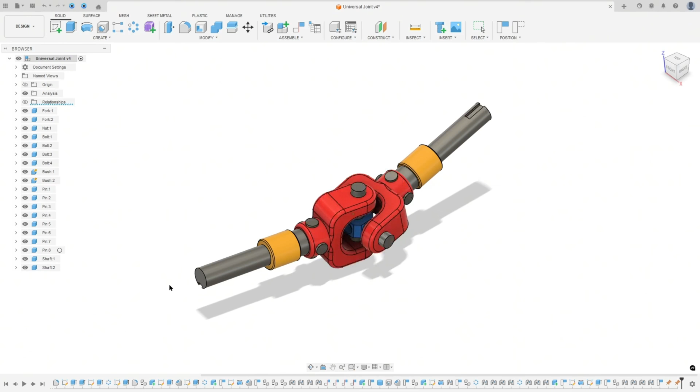Let's make one more tutorial in Autodesk Fusion. In this video, you'll learn how to design a universal joint. So open Fusion and let's go.

The first step to create the universal joint is to make part 1, the fork. Here will be the midpoint. The first thing we'll make is a construction line with 56 millimeters, and we'll make this sketch. The fillet we'll make later. This line has 15 millimeters, this line 19 millimeters. The distance between this line and this one is 42 millimeters.

So open Fusion and go to Assemble, select new component. The name here will be fork, and press OK. Go to create a sketch, select the front plane, select line, a construction line.

Click here in the midpoint, make a construction line with 56 millimeters of length. Select the line again, but remove the construction line type. Make this sketch.

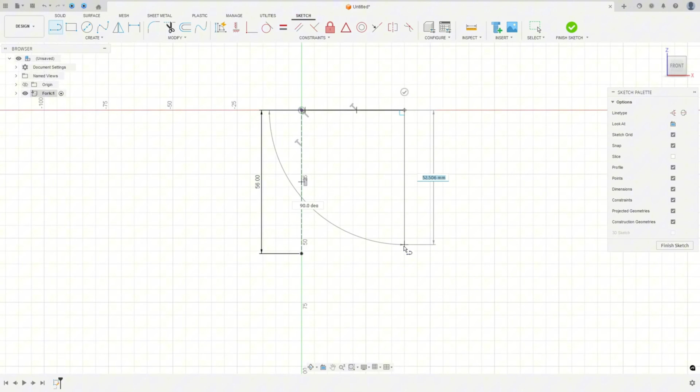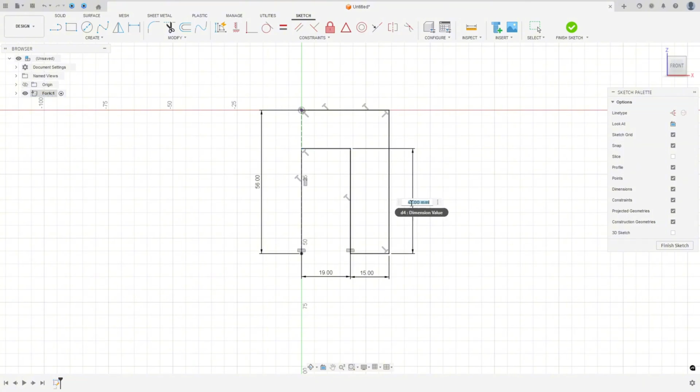Go to constraint, select horizontal vertical, select this point and this point here. Go to sketch dimension, the distance here 15 millimeters, the distance here 19 millimeters, and the distance between these two lines is 42 millimeters. We made this.

Now go to mirror, the object, select this line. I made 2 lines here, sorry. Select this line here, and for the mirror line, select this construction line and press OK.

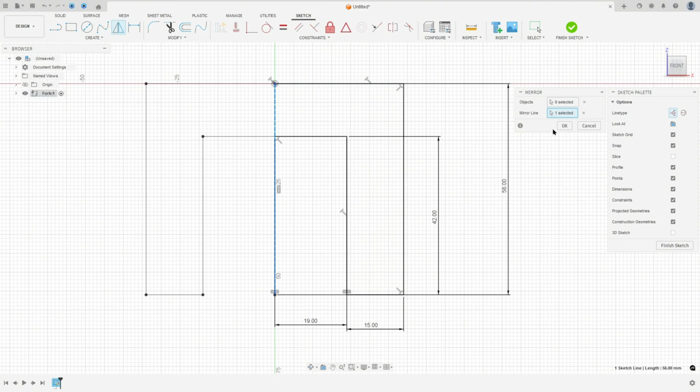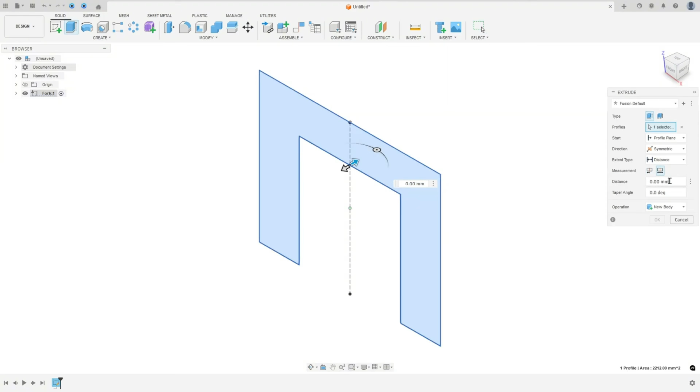Finish the sketch. We need to extrude this. The distance between these 2 points will be 34 millimeters. So go to extrude, select this profile, the direction symmetric, measurement whole length, the distance 34 millimeters. Operation new body, press OK. We made this.

Now we'll make this fillet here. This fillet has 17 millimeters. To make this, we use the full round fillet. So go to fillet, the fillet type, select full round fillet. Select this face, add selection set, select this face and press OK. We made this.

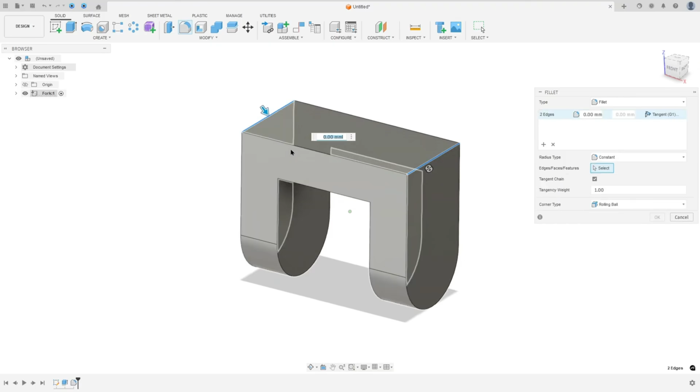Now we'll make this fillet with 15 millimeters and this one. So go to fillet again, the type, select the fillet, select this edge, this one, this edge and this one, 15 millimeters of radius and press OK. We made this.

Now we'll make this cylinder here. We have a circle with 34 millimeters of diameter and a hole here with 19 millimeters of diameter, and we need to extrude the cylinder 20 millimeters.

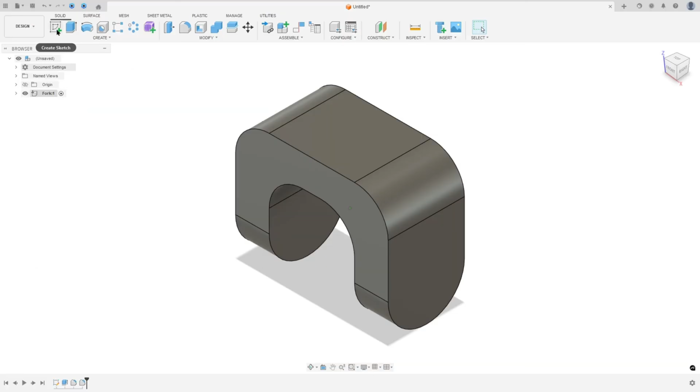So go to create a sketch, select this face, select the circle, make a circle here with 34 millimeters, and make another circle here with 19 millimeters of diameter. Finish the sketch, go to extrude. Extrude this 20 millimeters, operation join and press OK.

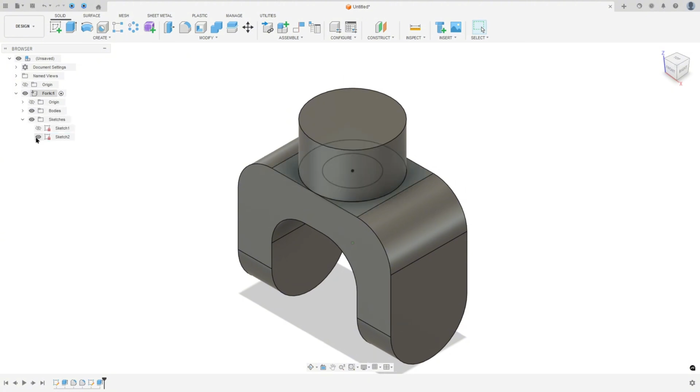Show sketch 2 again and go to extrude, select the circle with 19 millimeters of diameter. The direction symmetric, the extent type select all, operation cut and press OK. Hide sketch 2. We made this.

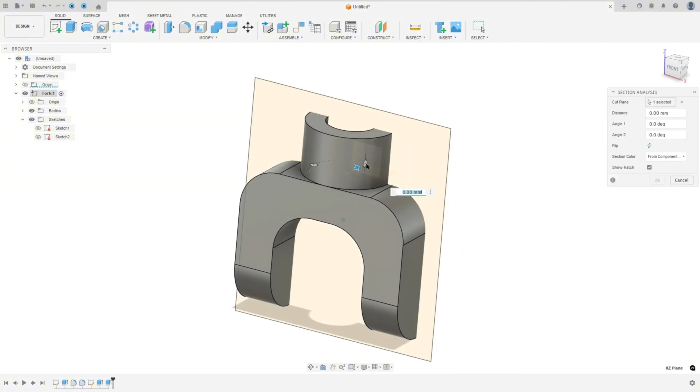Let me show for you. We made this, okay.

Now we'll make this hole here. This hole has 6 millimeters of diameter, and the distance between the center of this hole and this face here is 10 millimeters.

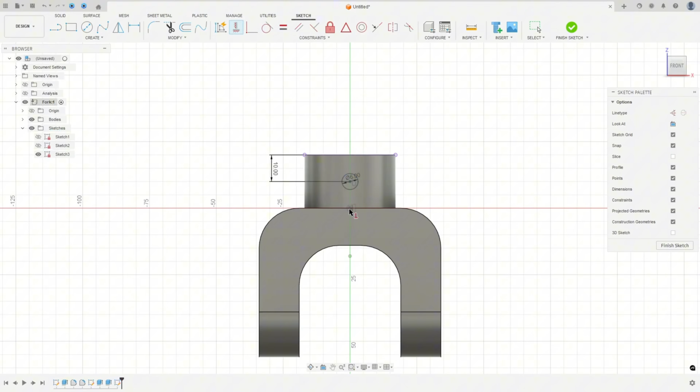So go to create a sketch, select the front plane, select a circle, make a circle with 6 millimeters of diameter. Go to sketch dimension, the distance here 10 millimeters, and go to constraint, horizontal, vertical, select this point and the midpoint. We made this, finish the sketch, and go to extrude.

The extrusion here, select all, operation cut, and press OK. We made this cut here.

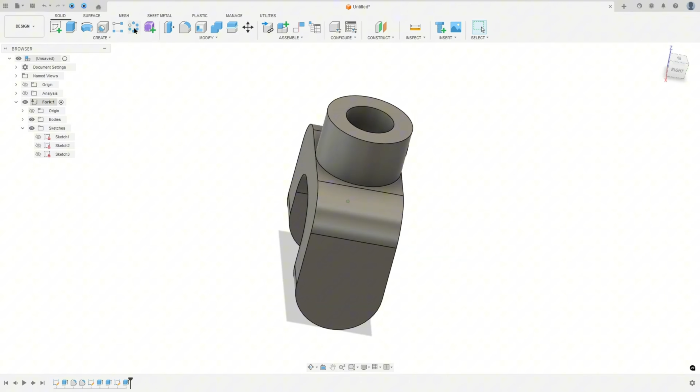Now go to create and select circular pattern. The object type, select features. The object, select this cut. And the axis, select this circle here. The quantity here is 4. Press OK. We made this.

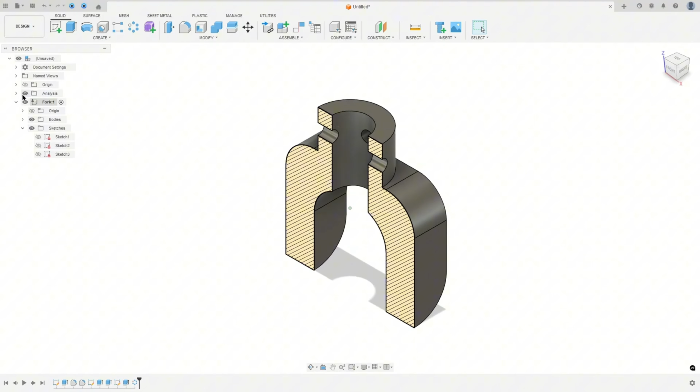Now we'll make this cut here. This cut has 12 millimeters of diameter, and the distance between the center of the circle and this edge here is 16.5. So it is not concentric with this arc, okay?

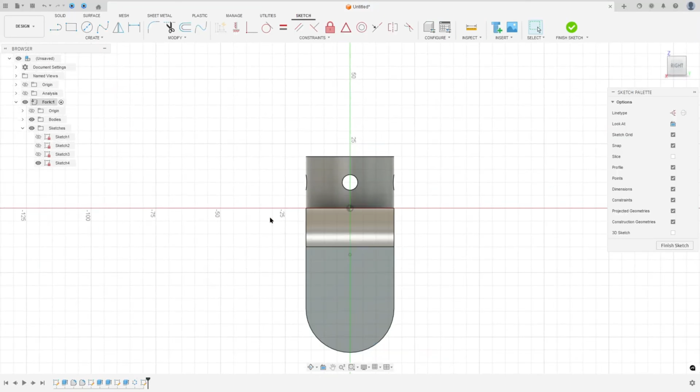So go to create a sketch and select this face here. Select the circle, make a circle here with 12 millimeters of diameter, and go to sketch dimension, click with the right button and select pick circle arc tangent. Select this arc here and this circle. The distance here 16.5. Go to constraint, select horizontal, vertical, select the circle and the midpoint here.

Finish the sketch, go to extrude, select this profile. The direction one side, the extent select all, flip the direction, operation cut, and press OK. We made this.

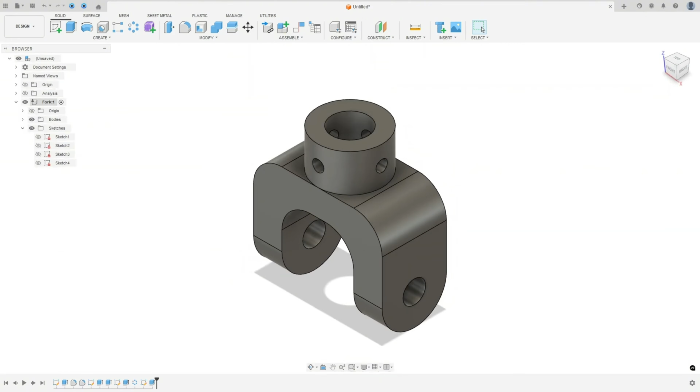Now we need to make a fillet here in this body. The fillet has 3 millimeters of radius. So let's create this. Go to Modify and select the Fillet.

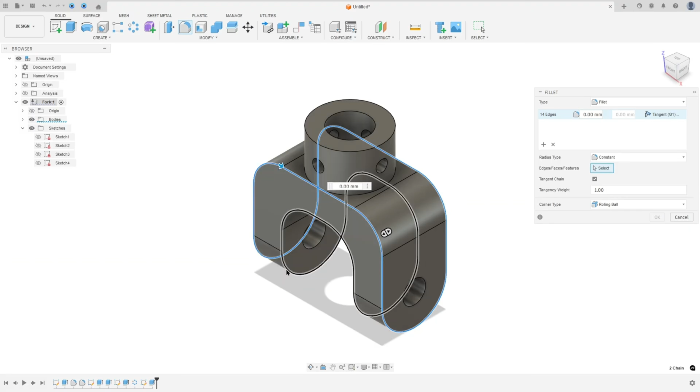Select this edge here, this edge, and select this edge here. The fillet here is 3 millimeters. Add selection set and select this edge here, 3 millimeters, and press OK.

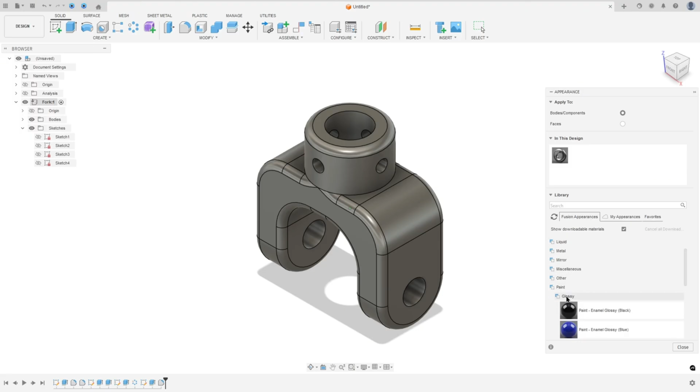We made this. Now I will add some color here. Press letter A in the keyboard. I will paint this. Select the painting, glossy. It will be red. Press OK. We made this.

Now save this file. Universal joint.

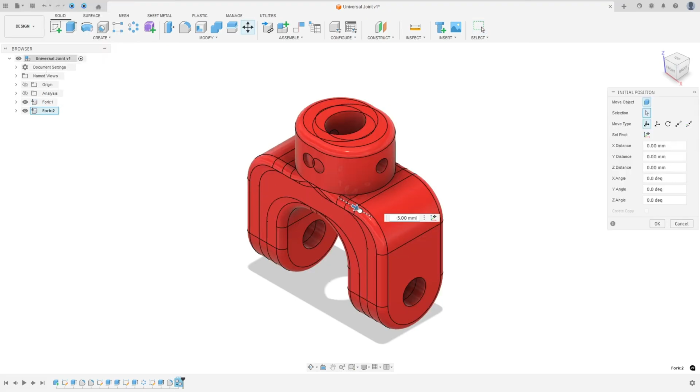And here activate this universal joint. And here click with the right button, copy and paste. Move this a little bit and press OK.

Now we'll make the part number 2, the nut. So the first thing that we'll make, we'll select the top plane and make a square, 25.4 millimeters on both sides. And we have a circle here with 12 millimeters of diameter. And we need to extrude this 15 millimeters.

So let's create this. Hide the fork 1 and 2 and go to Assembly, select New Component. The name here will be nut. Press OK. Go to create a sketch and select the top plane and select the 2-point rectangle, center rectangle, click here in the midpoint.

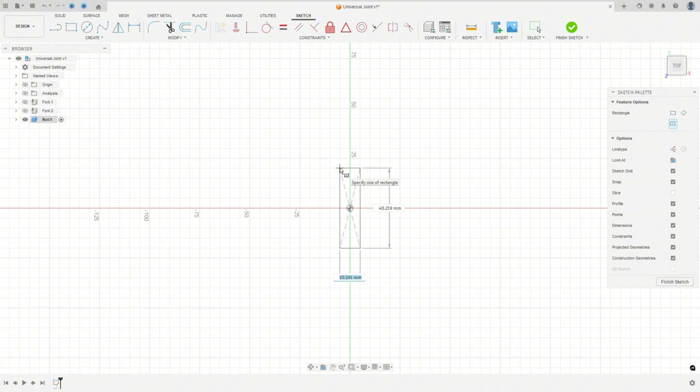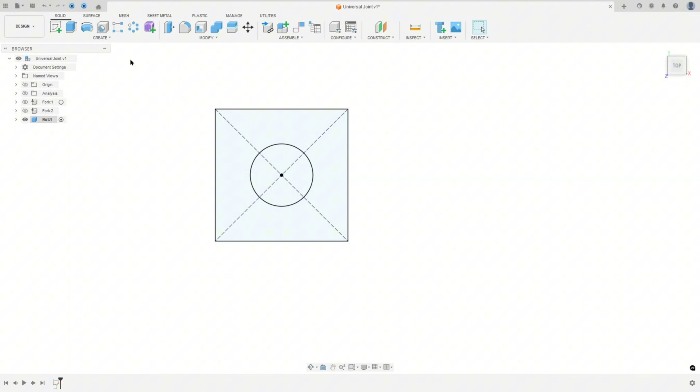25.4 by 25.4, press OK. And select the circle. Make a circle here in the midpoint with 12 millimeters of diameter and press OK. Finish the sketch, go to Extrude, select this profile, extrude this, the direction symmetric, measurement whole length, and the distance 15 millimeters. Operation new body, press OK.

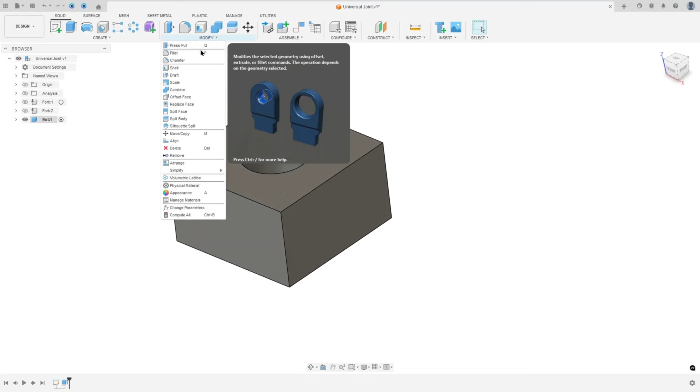We made this. Now let's make the chamfer here. The chamfer is 5 by 5 millimeters. So go to Modify, select the Chamfer, select this edge, this edge, this edge, and this one. The distance here is 5 millimeters. And press OK.

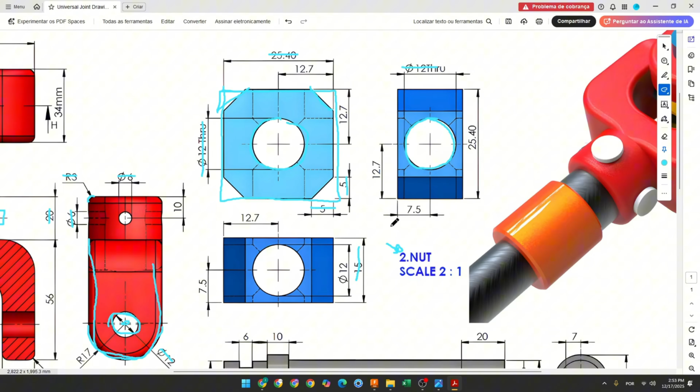Now we'll make the cut in the other side. The cut has 12 millimeters of diameter. So let's create this.

So go to create a sketch and select this face, or select this plane, select the circle, make a circle here with 12 millimeters. Finish the sketch, make sure that the circle is in the center of the plane, and go to Extrude, Direction symmetric, Measurement whole length, and the extent type select all, and press OK.

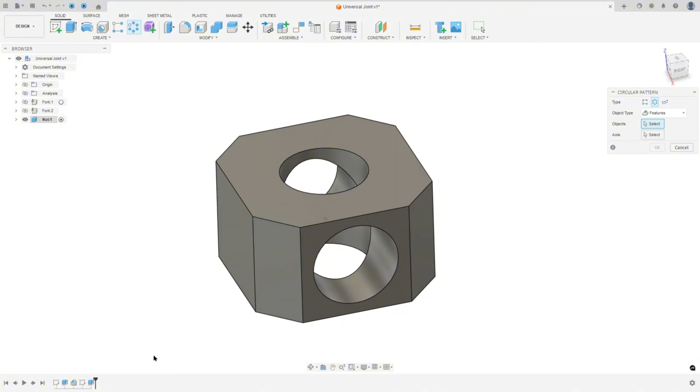We made this. Now go to Circular Pattern, the object type select features, the object select this cut, the axis select this circle, the quantity here is 2, distribution here partial, 90 degrees, and press OK. We made this.

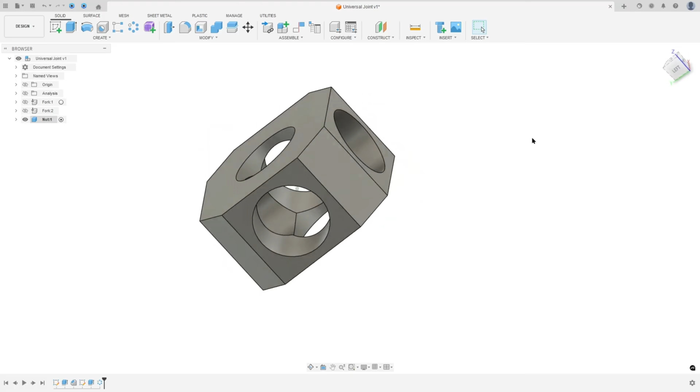Now I will add some color here, press letter A in the keyboard, it will be blue. Okay, we made this.

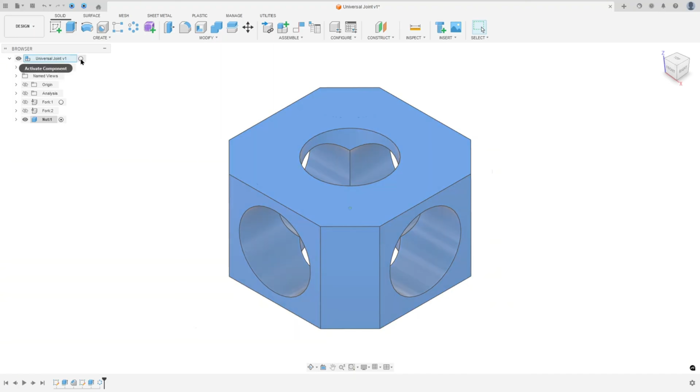Now activate the universal joint. Let's see the other components here. Let me move this component a little bit and save the file.

And now we will create the component 3, the bolt. And here, to create this, we'll select the front plane and make this construction line. And make this sketch here. The distance between these two lines here, 33 millimeters.

The distance here, 7 millimeters. And the distance here will be 6 millimeters. And the distance here will be 7 millimeters. Okay?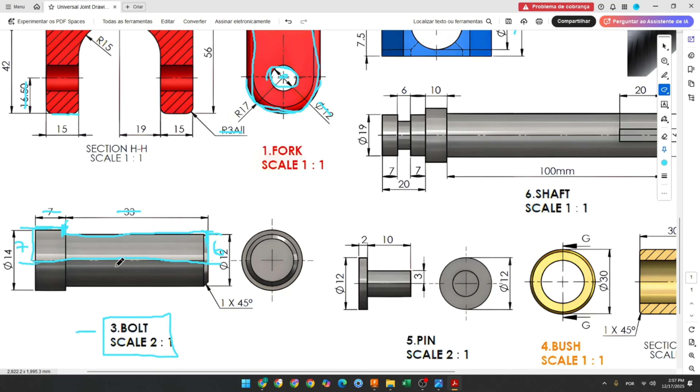So hide the fork 1, 2, and 3. And go to Assembly, select a new component. The name here will be bolt. And press OK.

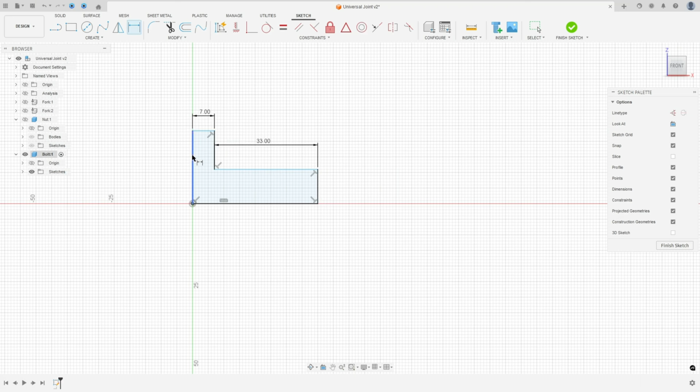And go to create a sketch and select the front plane. Select a line. Make this sketch here. Go to sketch dimension. The distance here 33 millimeters. The distance here 7 millimeters. This line here has 7 millimeters and this line here has 6 millimeters.

And go to finish the sketch and go to Revolve. The axis, select this line here. Operation new body, press OK.

Now we need to create a chamfer here with 1 millimeter. So go to Modify, select the Chamfer. The type equal distance, select this edge here, 1 millimeter, and press OK. We made this.

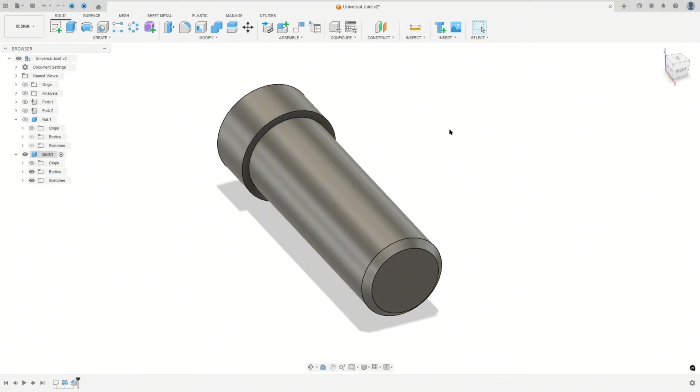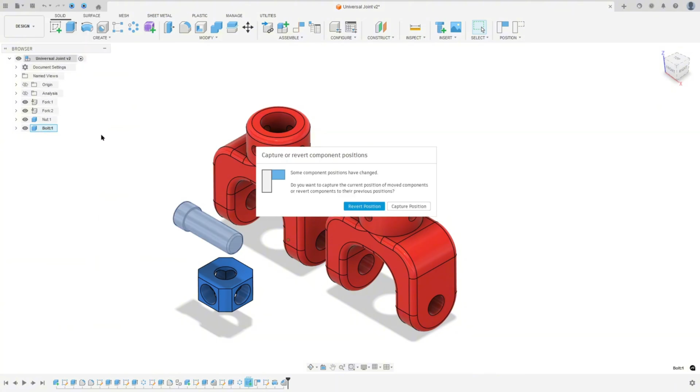Now activate the universal joint. Show the other components, I'll move this a little bit. In this exercise we will need 4 bolts, 1 and 2 on the bottom side here, and on this face we have 1 more. So click with the right button here, copy this and paste. Capture position, move this a little bit, press OK, paste again, Ctrl V, press OK, and paste 1 more, and press OK. We made this.

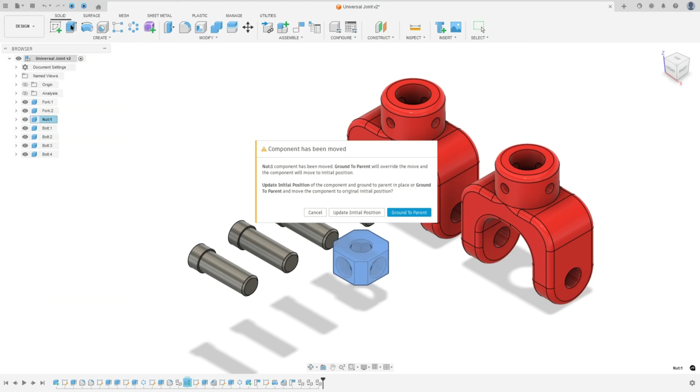Now click with the right button here in the fork and unground from parent. Make the same for fork 2, unground from parent. And in the nut, click with the right button and ground to parent. Move this a little bit.

And here, go to assembly, select joint. Select this circle and this one. Flip the direction and press OK. Make the same for the other component here, the bolt and the fork.

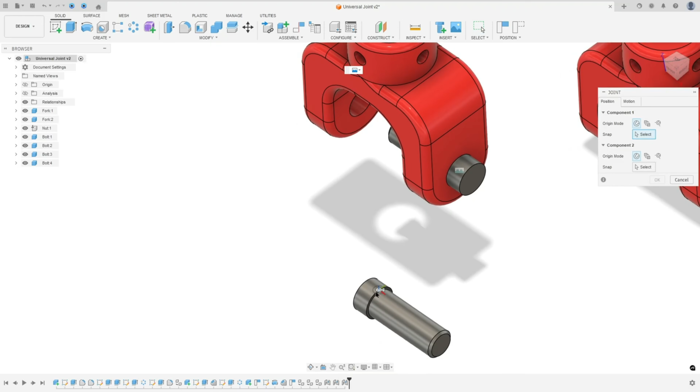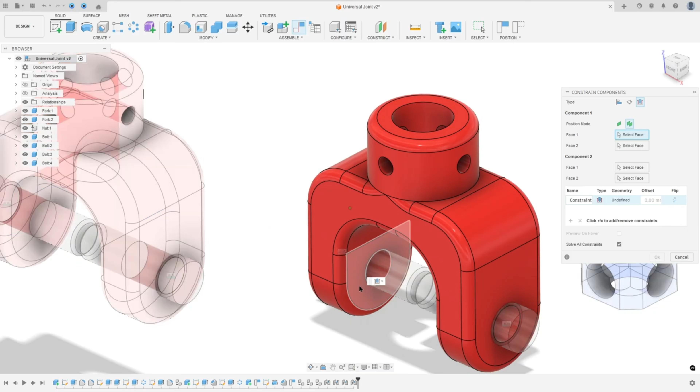We made this. Now go to assembly and select constraint components. For the type here, select center. Component 1 will be this fork, so select this face and this face here. Component 2 will be the nut, so select this face and this face. We made this, press OK.

And go to constraint again. For the type here, select align, select this surface here, and select this face here, this circle, to make this concentric, and press OK. We made this.

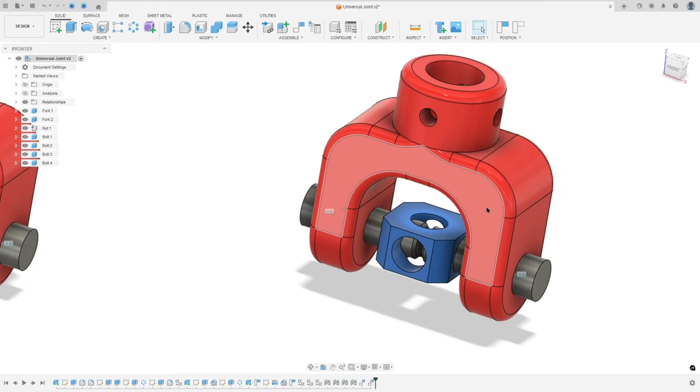Now make the same for this one. Let me rotate this a little bit. Go to constraint, and for the type here, center, select this face and this face here. And in the nut, select the top face and the bottom face. And press OK.

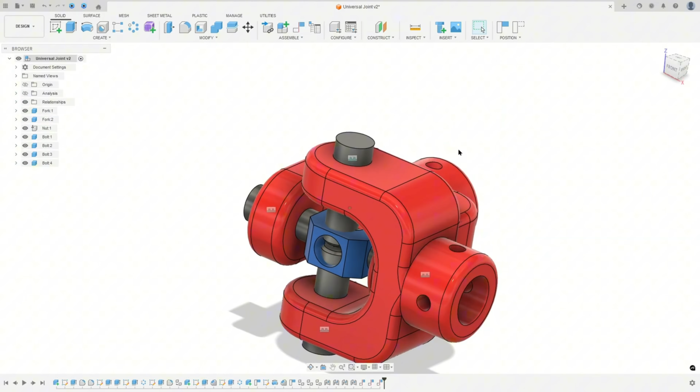And go to constraint again, select this face and this face here to make this concentric. And press OK. We made this, OK.

Now we'll make the bush, number 4. So to create this bush, we'll make a cylinder with 30 millimeters of diameter and 30 millimeters of length. And in the center we have a hole with 20 millimeters of diameter. And in the corners we have a chamfer with 1 millimeter.

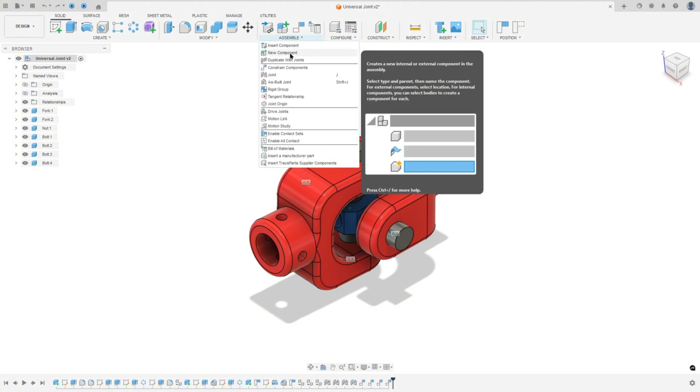So go to assembly, select new component. The name here will be bush. And press OK. Hide the other components.

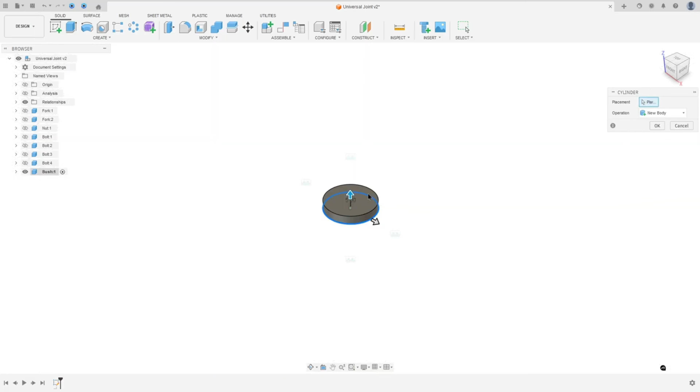And go to create and select the cylinder. Select the top plane, capture position, click here in the midpoint. The diameter here is 30 millimeters. And we need to extrude this 30 millimeters.

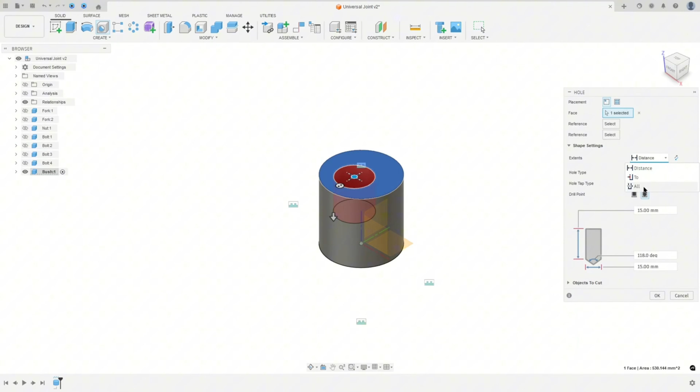And press OK. The hole here, 20 millimeters. So go to create, select the hole, select this face. For the extents, select all. Add reference, click here in this arc. And the diameter, 20 millimeters. And press OK.

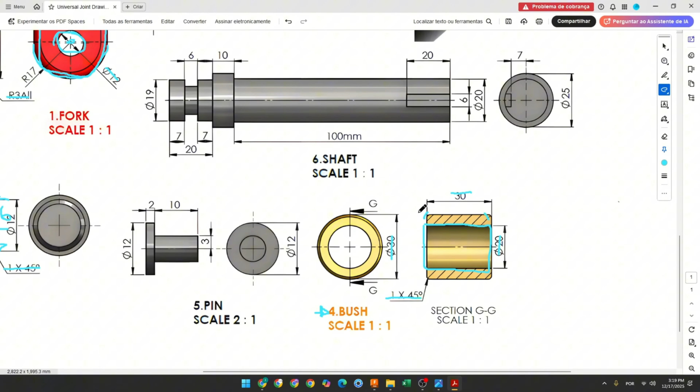We made this. Now we need to create this chamfer with 1 millimeter. So go to modify, select the chamfer, select this edge and this edge here, 1 millimeter. And press OK. Press letter A on the keyboard, I will paint this yellow.

OK, activate the universal joint and show the other components, and save this project. I will move this a little bit.

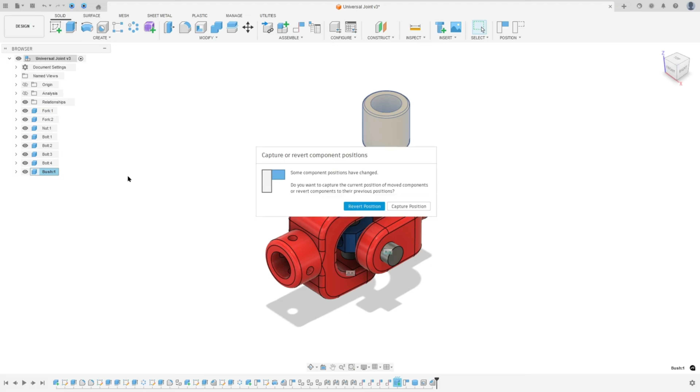Now click with the right button here and copy this and paste, Ctrl V, capture position, move this a little bit, press OK.

Now we'll make part 5, the pin. So to create this, we'll make a construction line here in the center, a line, sorry, in the center, and create this sketch here. We have the dimensions: 2 millimeters here, 10 millimeters, 3, and here is 6. And we'll use the Revolve feature to make this body.

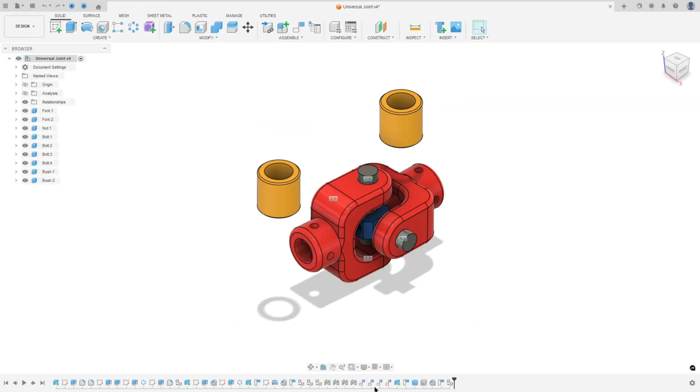So go to Assembly and select new component. The name here will be pin. Press OK. Hide the other components. And go to create a sketch. Select the front plane, select line. Make this sketch here.

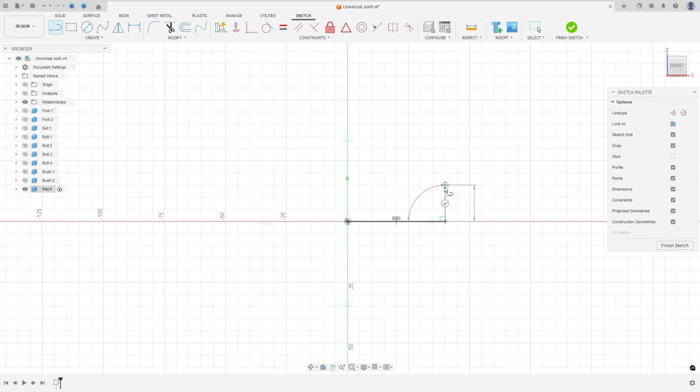Go to sketch dimension. The distance here is 2 millimeters. The distance here is 10. 3 millimeters here and 6 here.

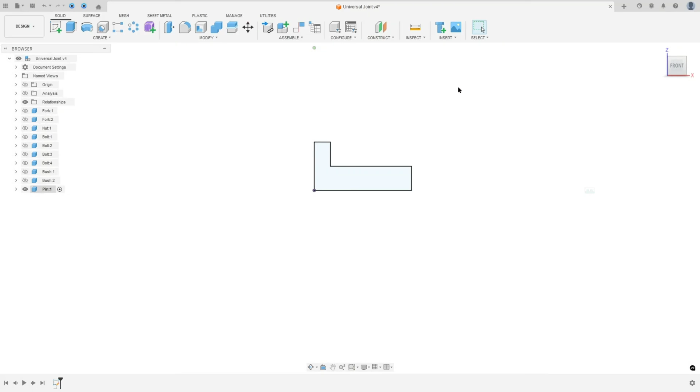And finish the sketch, go to Revolve. The axis, select this line and press OK. Show the other components, I will move this a little bit here. Show the other components. And activate the universal joint.

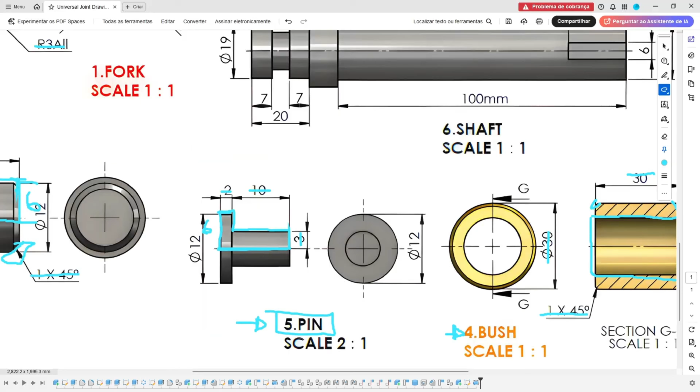Let me ground it to parent here. Okay, let me move this a little bit. And here we'll need to make 8 of this one, 4 for each side.

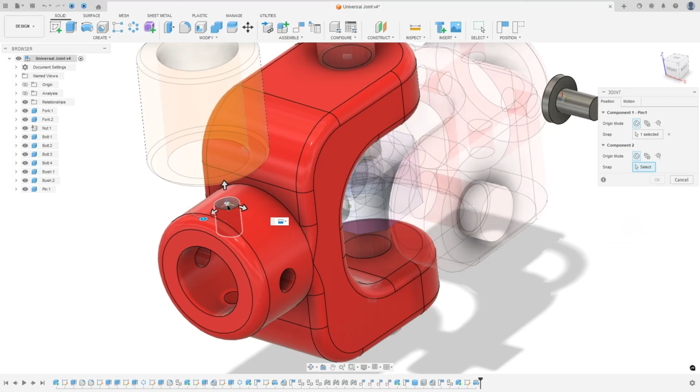So go to Assembly, select joint, and select this one, and select this face here, the center of this face. Flip the direction. Let me hide this bush here and press OK. We made this.

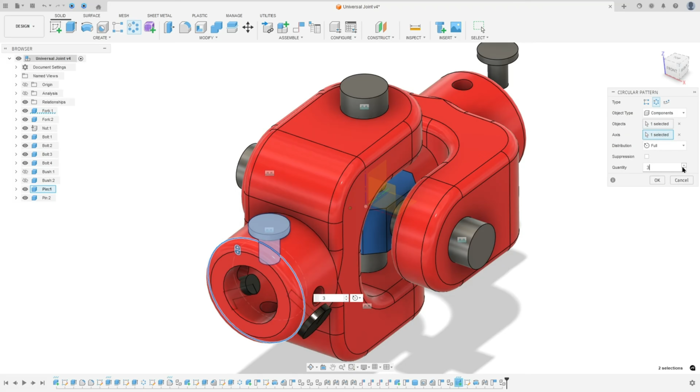We need to create 3 more on this side, but first copy this and paste, Ctrl V, move this a little bit here, press OK. And here go to circular pattern. For the component, the object type, select component. The object, select this component. The axis, select this arc here. Quantity 4, press OK.

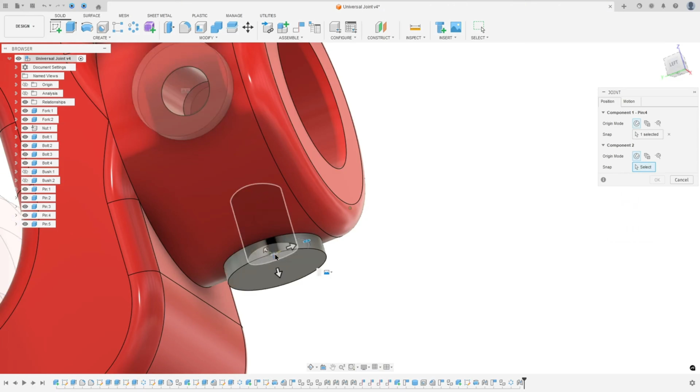We need to create a joint, so go to joint. Select this arc here and select the center of this face. Press OK. The same for this one: select this arc and the center of this face. And the same here, press joint or letter J.

Now make the same for the other side. I use the circular pattern to copy this.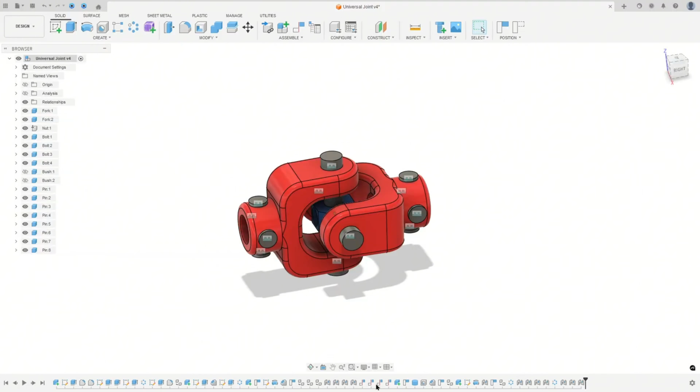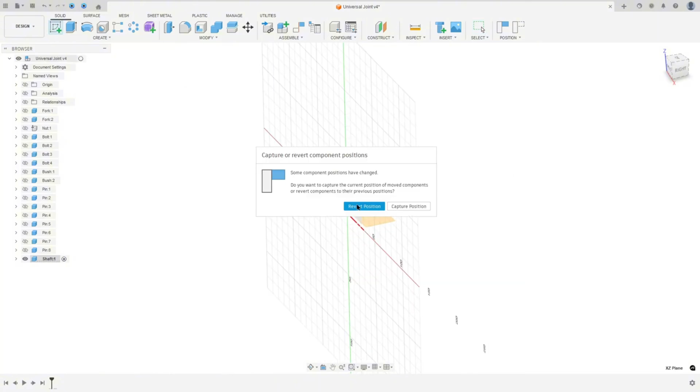Go to assembly, select a new component. The name here will be shaft, and press OK. I will hide the other components here. And go to create a sketch, select the front plane, select line, click here in this point, 130 millimeters.

Make a line here with 10 millimeters, a line here with 100 millimeters. And here, make a line here, this line has 10. Go to sketch dimension, the distance here is 25/2. And here, we'll make these two lines here. The distance between these two lines and this one is

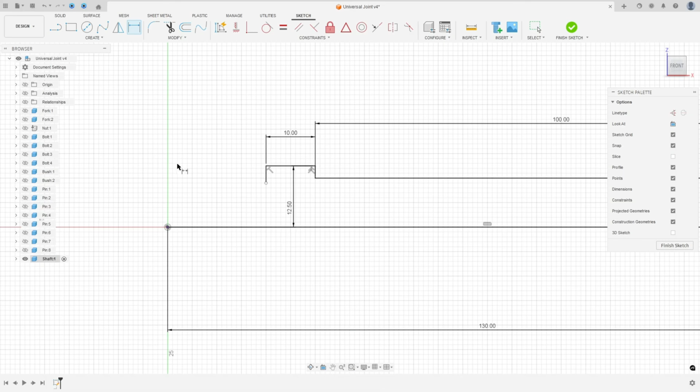19/2. And here we will create, this line has 7, and this one has 7, and here has 6, and the distance between this line and this one is 3 millimeters. So select line, make this sketch here, 3 millimeters here, 6 here.

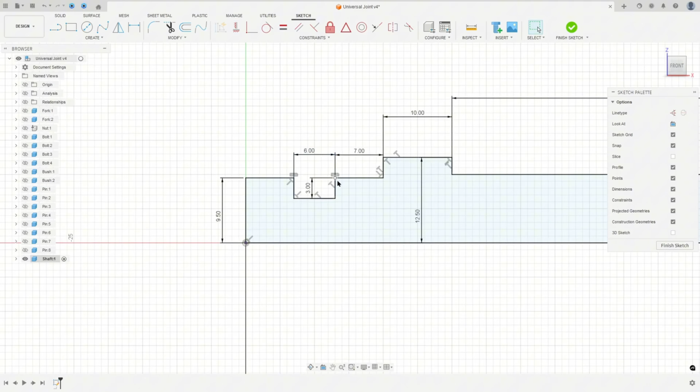Go to constraints, equal, go to sketch dimension, the distance here, 19/2. Go to constraints, horizontal, vertical, select this point and this point here. We made this. Now finish the sketch and go to Revolve. The axis, select this line and press OK.

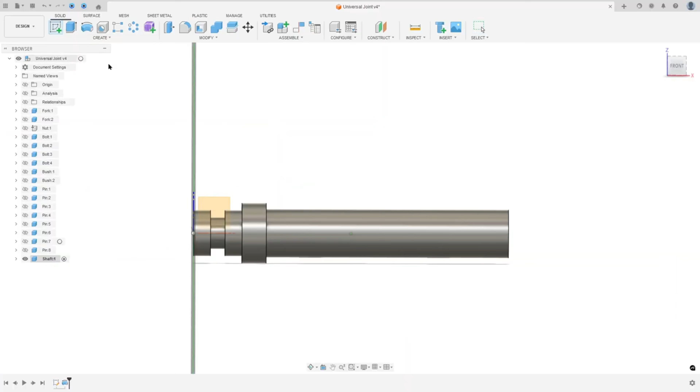Now we need to create this cut here. So this cut has a rectangle with 20 by 6 millimeters. So let's create this. Go to create a sketch, and here select the top plane and go to create project, include project, selection filter body, select this body here and press OK. You can hide this body a little bit.

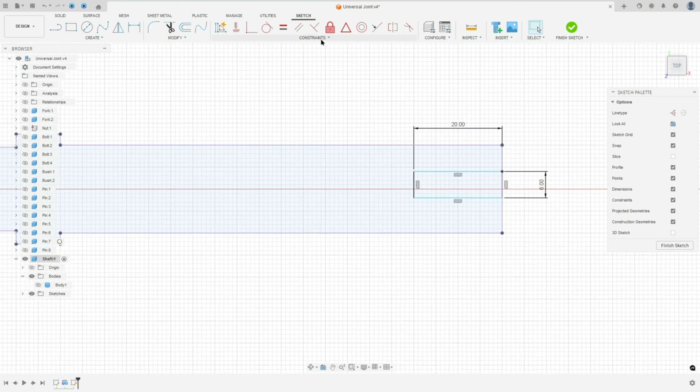Select the 2-point rectangle, click on this line, make a rectangle here 6 by 20 millimeters. And go to constraint, select the midpoint, select this line and this one, and finish the sketch. We need to make this cut. So the plane is here. So we'll make an offset extrusion with 7 millimeters of distance.

So go to extrude, select this rectangle, show the body one. The start here, select the offset, the distance 7 millimeters. The extent type, select all, operation cut, and press OK. We made this cut here.

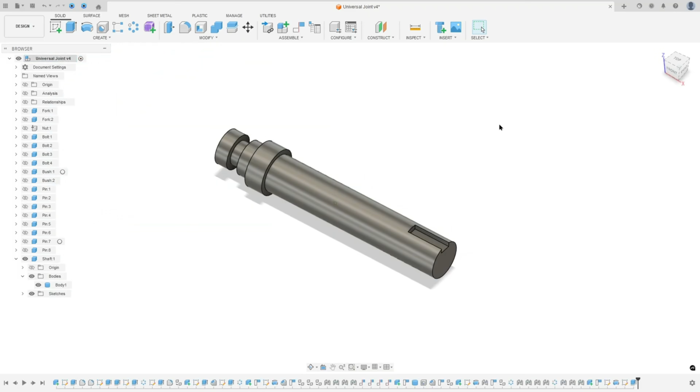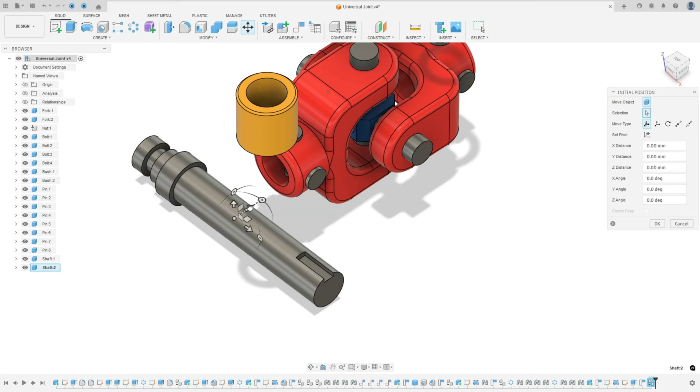Now activate the universal joint and show the other components. I will move this a little bit. And we need to make a copy of this shaft. So click with the right button here, copy, and press Ctrl V to paste. And press OK. Now here, go to assembly, select the joint, select this circle here, and this one, and press OK. Let me see the analysis.

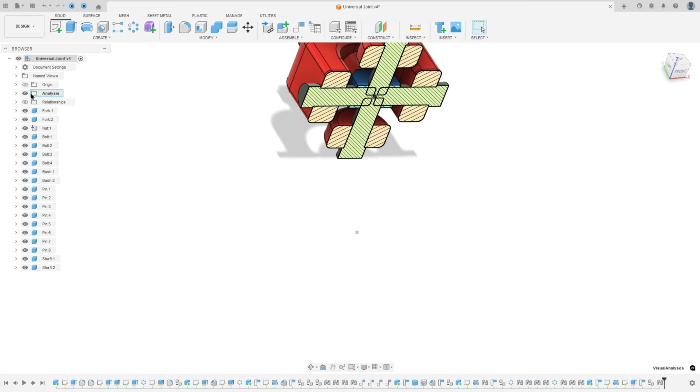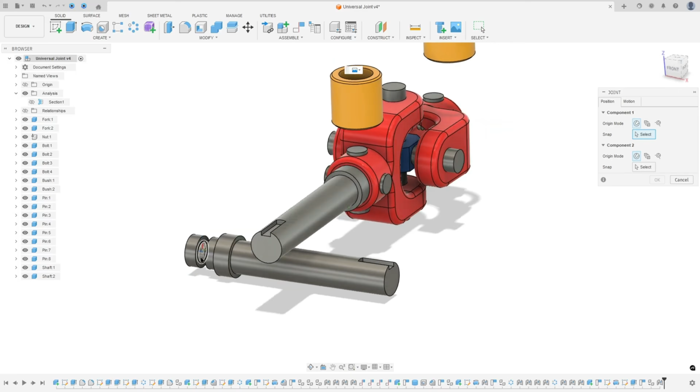Let me change the analysis direction here. Look how it is working. Okay, now go to joint again and select this circle here and select this one, flip the direction and press OK. Show the analysis here. We made this.

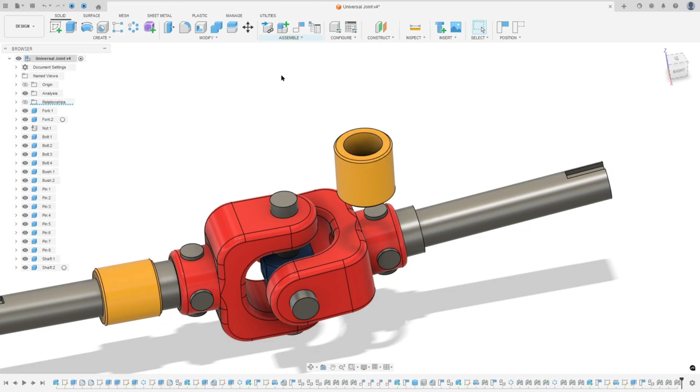And now go to assembly, select the joint, select this circle here and this one, flip the direction. The motion here is revolute and press OK. Make the same for this one. Go to assembly, select the joint, select the circle and select this one. Flip the direction, the motion here, select revolute and press OK.

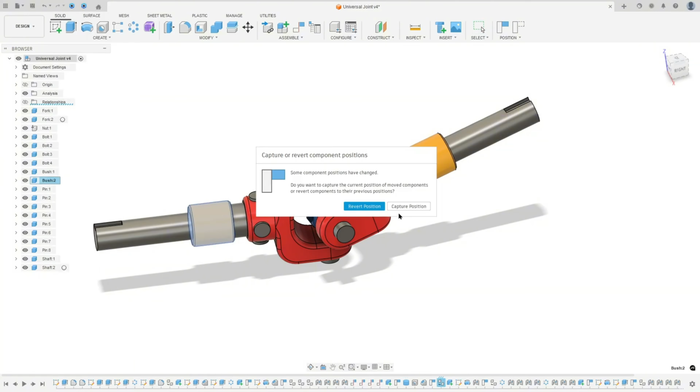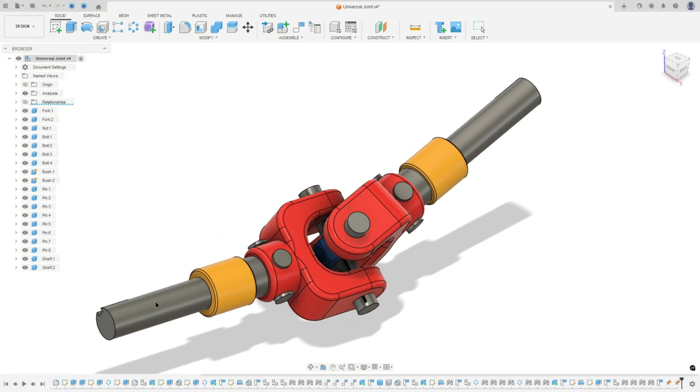Now I will move this a little bit here and a little bit here. Okay. Click with the right button here in the bush two and select pin, capture position. Click in the bush one and select pin. And click here in nut with the right button and select ground to parent. We made this. Now you can click here and hold, and you can rotate this. So here we finish our exercise.